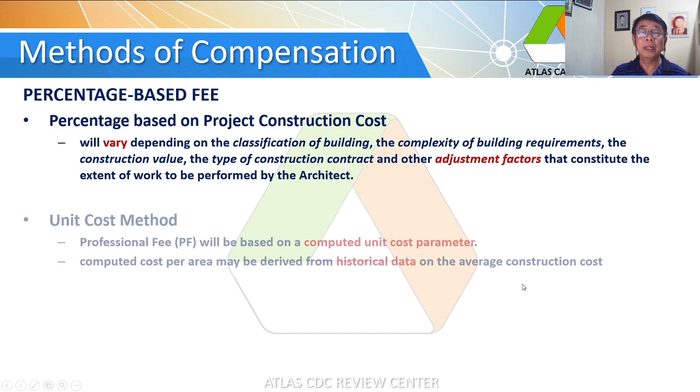So later on, I'm going to discuss what are these adjustment factors that have to be considered in order to determine the percentage fee based on project construction cost. Now we go to the new one that is introduced in this particular document, the unit cost method. Although other professions are using this already, like for example electrical engineers, they charge according to per ampere, and structural engineers I think charge according to per square meter.

So here, the professional fee of the architect is based on a computed unit cost parameter, and that is per square meter. Now, the computed cost per area may be derived from historical data on the average construction cost. So you have to be aware of the prevailing average construction cost. So let's say we have an office building project with 1,000 square meters gross floor area and 200 square meters non-gross floor area. For GFA and non-GFA areas, please refer to Rule 7 and Rule 8 of the NBCP.

So for example, we have the average project construction cost based on historical data, or the prevailing one, is 30,000 pesos per square meter. So that is the construction cost for an office building project. And the PF of the architect uses the percentage of project construction cost. Let's say the architect is using 6% of the project construction cost as the PF.

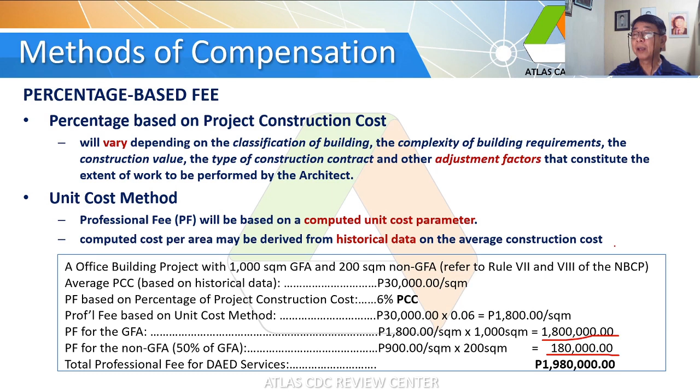So here, in this case, the client would easily understand that if the floor area increases, there will be an increase in the professional fee as well. So sometimes kasi the client, they better understand the relationship of the cost according to the floor area. So we have this one again.

Part of the percentage-based fee method is the value-based pricing, or the percentage of gross rentals. And this particular type of compensation is usually used for building administration. So this is based on the outcome of revenue, cost, and profitability result of a project management, or based on a measurable profit on specific revenues. So the remuneration may be based on a certain percentage of the gross rental.

So if the building administrator can increase the gross rentals through some efficient use of spaces, then the compensation of the architect doing building administration will also increase because it is based on the gross rentals.

So we now go to the lump sum or the fixed fee. So this is normally not used for private projects, but now it is already being allowed. But caution is to be exercised when making use of the lump sum or fixed fee. So gagamitin lang ito when the scope of services required can be clearly and fully defined at the outset of the project. So meaning, klarado na lahat. Well-defined ang scope of services or scope of work na naka-stipulate doon sa contract.

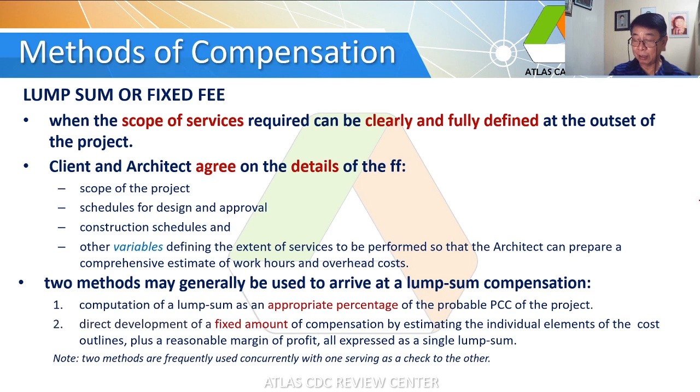So we now go to the third one, the time-based fee. And the time-based method of compensation is typically used for the following. So we have services which are not well defined, so you cannot use the lump sum, or you cannot use the percentage. So for services like pre-design, medyo sa pre-design services kasi more on documentation, so you can compute how many man hours can be used to do that particular kind of service.

We have partial services, additional services, or services as an expert witness, or a specialist expertise or professional architectural consultancy services. So pwedeng per hour yan, per day, per month, and so on.

The hourly or per diem daily rates for architects and their staff should be agreed at the outset, sa simula pa lamang ng usapan or sa contract, nag-agree na sa contract kung magkano talaga yung hourly or per diem. Additionally, the client and architect should agree upon a time period for review and adjustment of the hourly rates, perhaps annually, so pwedeng ilagay din sa contract yung provision na pwede mabago yung rate because kakaroon din ng inflation, to adjust for inflation and other factors.

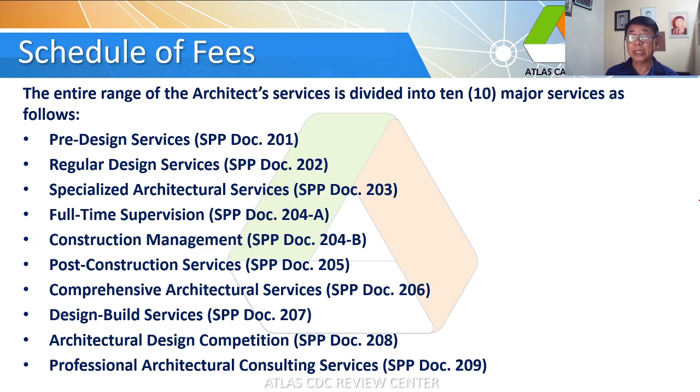If you notice, one type of service here is architectural design competition, so this will not be included in our discussion for the schedule of fees. So from 207, we skip 208 and go to 209.

So let's start with SPP document 201, pre-design services. You can use the following method of compensation: the MDPE, actually this is the most preferred one for pre-design services because pre-design services does not entail any design output. So we have professional fee plus expenses, lump sum or fixed fee, per diem honorarium plus reimbursable expenses, or the mixed methods of compensation.

Now for pre-design services, compensation is based on the architect's or architectural firm's talents, skill, experience, imagination, and the type and level of professional services provided. Since MDPE is the most preferred one, you can choose your multiplier, from 1.5 to 2.5, and the choice, of course, is based on those mentioned factors.

Now, the architect should request a 5% acceptance fee based on the agreed professional fee upon signing of the agreement. So that 5% acceptance fee is like an initial payment. It's not a down payment but an initial payment for accepting the challenge to do the architectural services. Now, the client shall make progress payments upon request of the architect within 7 calendar days from the submission of the statement of account. The architect can set how the progress billing will be, whether once a month or every 15 days, and shall submit to the client a statement of account, so that the client has a time frame of 7 days to pay the architect.

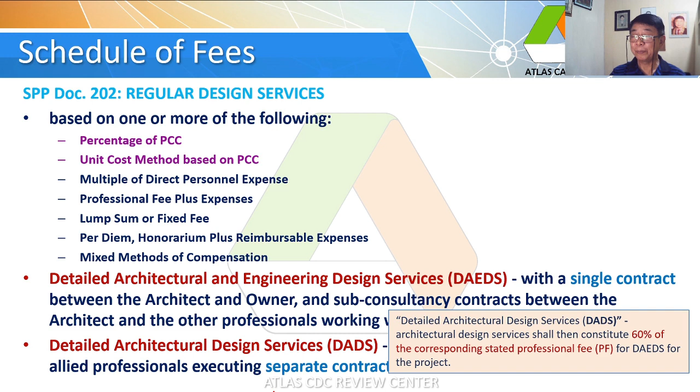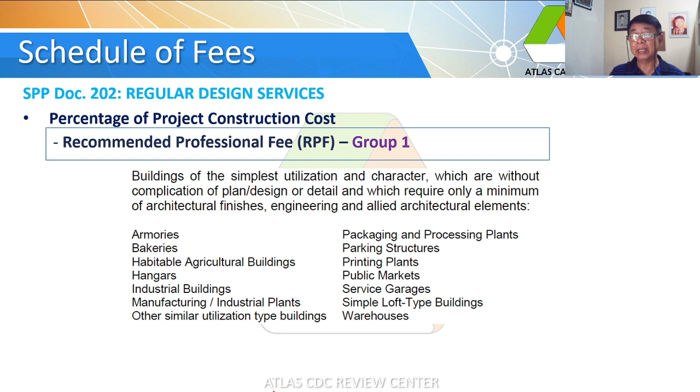So this is the recommended professional fee. Take note, we use the recommended professional fee, not the basic minimum fee - just the recommended professional fee, meaning you may use this one, or go higher or lower using the adjustment factors based on the requirements of the project.

Now for the complete services, the detailed architectural engineering design services or DAEDS, for Group 1, for 50 million and less, the recommended professional fee is 5%. If that is only architectural design services, then the professional fee is 3% of the project construction cost. Now if the project construction cost is over 50 million, the percentage goes lower for every particular range. So if it exceeds 50 million up to 100 million, the excess is computed at 2.4% for DADS and 4% for DAEDS.

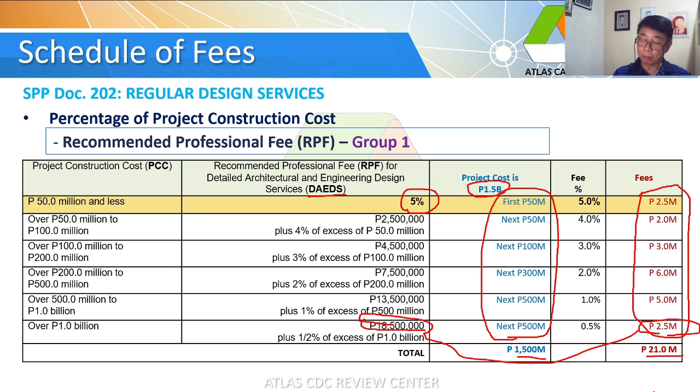Now we go to group 2. These are buildings of moderate complexity of plan design. So you have here the residential condominiums. So these are high-rise residential, multi-story service apartments. And also we have commercial buildings, retail, shops, supermarkets. And also we have institutional buildings like city town halls, civic centers. And we also have here parks and recreational facilities. So these are the most common types of projects.

So group 2, the recommended professional fee for DAEDS is at 6% for 50 million or less. And for DADS, the detailed architectural design services, it is 3.6%. Again, kapag lumampas sa 50 million yung construction cost, then take note the excess is computed at lower percentages.

Now we go to group 3. These are now the buildings of exceptional character and complexity of plan design. And these, if you will notice, yung mga buildings na to ay very complicated in terms of planning and design because marami silang rooms, maraming partitions, and also they incorporate certain types of specialty equipment inside the buildings.

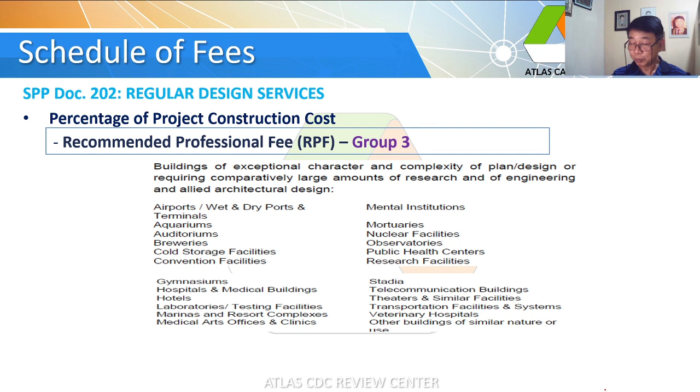So for group 3, the recommended professional fee for the complete type of service, detailed architectural engineering design services, is at 7% for 50 million and less. And for detailed architectural design services only is 4.2%. Now, if we summarize, for detailed architectural and engineering design services for groups 1, 2, and 3, we have 5, 6, and 7% respectively.

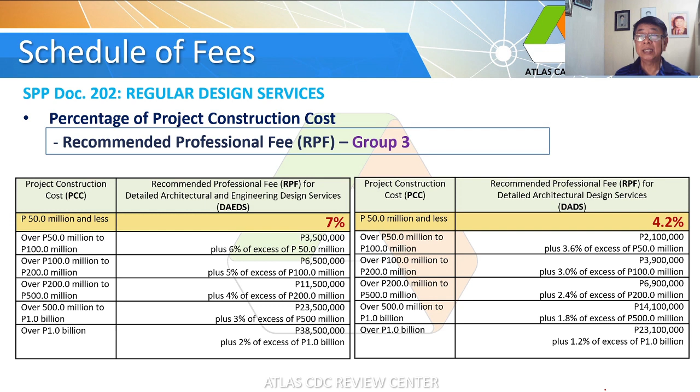Now we go to group 4. This is the most common residential type of project, but only for single detached or single attached or duplex, row houses, shop houses, or small apartment houses, and townhouses. So these are the single family dwellings only. So we have here the DAEDS. The recommended professional fee is 10% of the project construction cost. Now, if that is detailed architectural design services or DADS, it is at 6% of the project construction cost.

Now, for group 5, we have monumental buildings and other facilities requiring a consummate design skill. So medyo detalyado itong mga designs dito. So we have the DAEDS at 12% of the PCC, and for detailed architectural design 7.5% is the recommended professional fee.

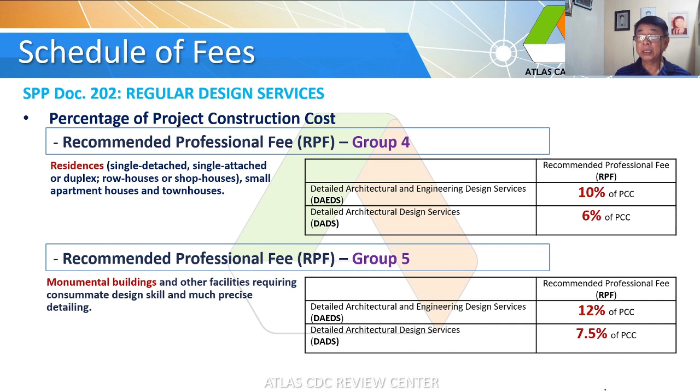Okay, so under group 6, we have the repetitive construction of similar buildings. Parang meron, let's say, regional office building na prepared a single plan and design, and then that particular plan and design will have to be repeated all throughout different regions. Of course, there will be some minor adjustments that will be undertaken because of certain site conditions.

So for the first building to be constructed, your RPF is 100% of the RPF for that particular type of building. So let's say that is a regional office building. Office building is under group 2, the RPF is 6%, which means for the first building, your RPF is 6%. Now, for the second building it is 50% of your RPF. So for the second office building, it means 50% of 6%. So that will be 3% only of the PCC.

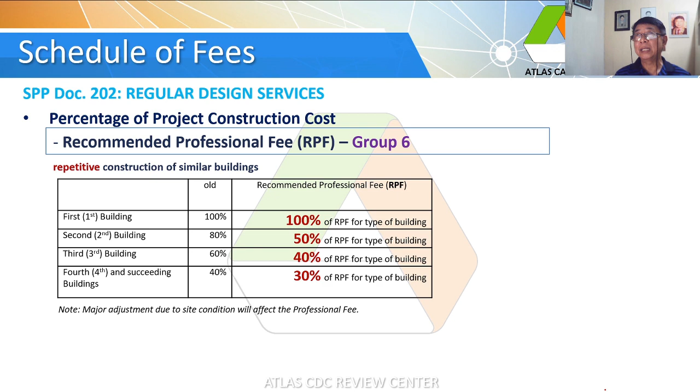And the third building is 40% of the RPF. So, 40% na lang of 6%. That is 2.4%. And fourth and succeeding buildings will be 30% of RPF. So 30% of 6% for the fourth building means it is 1.8%.

Okay, we go to group 7. These are now for housing projects that involve the construction of several residential units on a single site. So pare-parehas yung design ng building. Let's say model house A, 100 units to be constructed. So you only prepare one plan for that particular house model. And so for that, the recommended professional fee is here.

The first unit, for complete architectural engineering design services, is 10%. And for detailed architectural design it is 6%, dahil halos pareho ito ng group 4, na single family dwelling. For apartments, hindi ito ginagamit, but you have to make use of group 2.

Now from 2 to 10 units of that housing unit, the fee is 50% of the fee for the first unit, and this is computed for each additional unit. So, kung magkano ang fee mo sa first unit, kalahati na lang noon ang charge mo sa bawat additional unit up to the 10th unit.

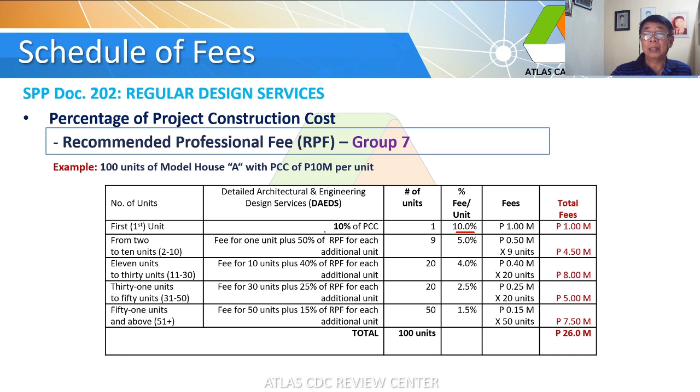So let's say you have 100 units to be constructed using model house A with a project construction cost of 10 million per unit. So ito yung reference natin. And the first unit, that is computed if your professional fee is 10%. Ginamit natin 10%. So 10% of the 10 million, your professional fee is 1 million.

Then for the second up to the 10th unit, so you have 9 units additional. So each unit is computed at 50% of 10% is 5%. So meaning that is 500,000, 0.5 million times 9 units, kasi for each unit. So it means you have a total of 4.5 million.

Now for the additional 20 units, that is computed at 40% of the first unit. So that is 40% of 1 million is 400,000 times 20 units. So your fee is 8 million. And for the next 20 units, it's computed at 25% of 10%. So that is 25% of 1 million is 250,000 times 20 units is 5 million.

And then the remaining 50 units is computed at 15% of 10%. So that is 1.5%, or 15% of 1 million is 0.15 or 150,000 times 50 units is 7.5 million. So you just total all of this to come up with your total professional fee of 26 million.

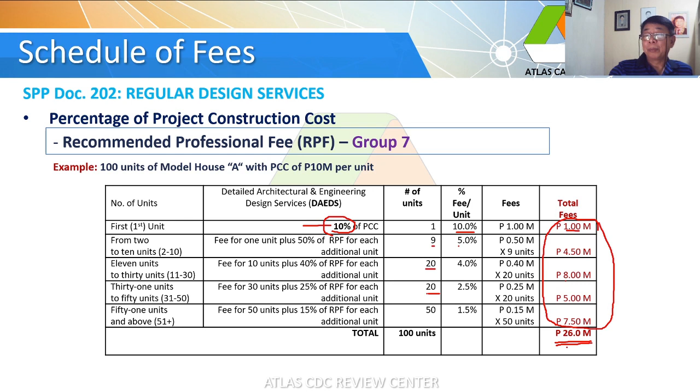Now for group 8, these are for projects involving extensive detailing such as designs for built-in components or elements, built-in equipment, special fittings, screens, counters, architectural interiors, and development planning and/or design. The recommended professional fee is 15% of the project construction cost.

Now for group 9, this is for alterations, renovations, rehabilitations, retrofit, and expansion additions to existing buildings belonging to groups 1 to 5. And so the compensation of architects should be increased by 50%, or a total of 150% of the RPF. So meaning you only have to multiply the RPF doon sa groups 1 to 5 by 1.5.

No? So let's say residential yan na i-renovate at ang RPF ginamit mo is 10%. So if you are doing renovation, it is 1.5 times 10%, meaning your fee now is 15%. Okay? Or you can just compute it by having 10% plus 50% of 10% is 5%. So that is a total of 15%. Parehas lang yon.

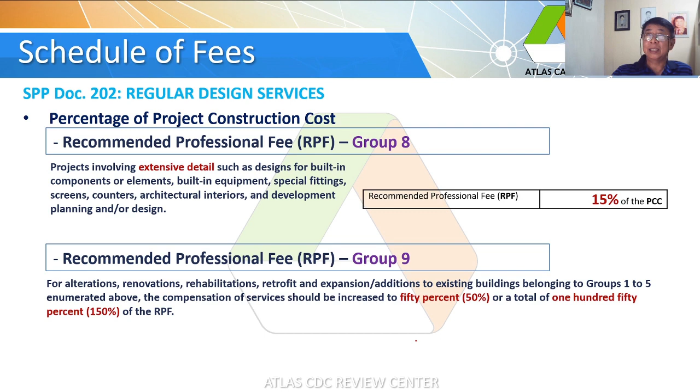Okay, we now go to group 10. This is for services wherein the architect is engaged to render opinion or give advice, clarifications, or explanation on technical matters pertaining to the profession. So this includes the pre-design services in SPP document 201 under consultation.

And so, the chargeable RPF of the architect shall not be less than 1,000 pesos per hour, subject to increase depending on the extent and coverage of service required and the location where the architect shall render his services. So pwedeng tumaas pa yan kung mas malayo yung location kung saan mag-render ng service yung architect, at saka kung mas complicated yung gagawing trabaho.

So, when rendering services as an expert witness, the architect's fee shall not be less than 5,000 pesos per appearance, regardless of whether the scheduled hearing took place or not. So this is per appearance. Kahit na hindi natuloy yung hearing, it is chargeable already.

So the amount excludes the cost of transportation and accommodations when and where required. So kung malayo yung location at kailangan magstay doon yung architect, then the cost of transportation and accommodation shall be shouldered by the client. And okay, so aside from this per hour or per appearance fee, the architect also shall be paid what you call the per diem if the location is very far from the architect's office address.

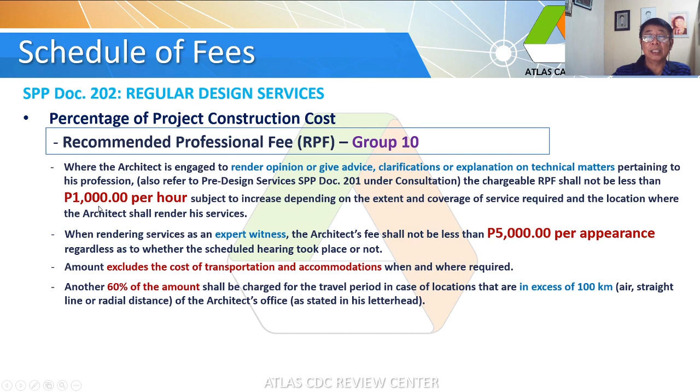Now note, all references to fixed amount shall refer to the value of the Philippine peso as of October 2014. So, kaya ito nilagay kasi nga nung ginawa yung document na to is nung 2014 pa. And so, you have to change this according to the value of the Philippine peso noong 2014 versus the current value of the Philippine peso.

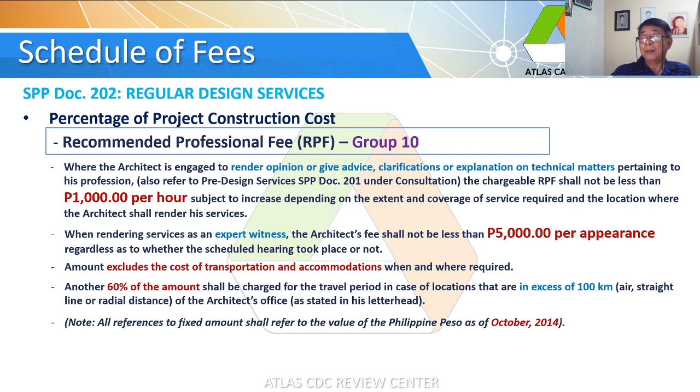Probably you can make use of as reference the annual inflation rate. The average inflation rate I think is at 5%. So you can make use of that, or you can just refer to the central bank record for the inflation rate.

Now, this is the manner of payment. Upon signing of the contract as serving as your acceptance, the mobilization component is 5% of your professional fee. So, you will be paid already once you sign the contract. Upon the completion of the schematic design services, you get an additional payment that will correspond to a total of 20% of your professional fee. So, kung meron ka ng 5%, madagdagan ng 15%, so the total is 20%.

Upon completion ng design development services, the total payment to the architect should be already 40% of the professional fee. And upon completion of the contract document services, the payment to the architect is already amounting to 90% of the professional fee. And now, within 15 days after the awards to the winning constructor, your professional fee shall be adjusted so that it constitutes 90% of your professional fee.

Pero kung sobra ang naibayad dito, upon completion ng contract documents, at lumalabas mas mababa ang computation dito based sa winning bid, then you don't need to return the excess money. So, pwede naman mag-balance yan sa last payment. Now, upon completion of the work, you will be paid already 100% of your professional fee.

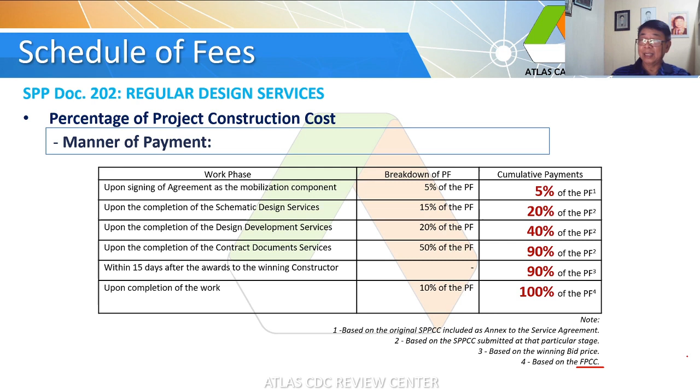So let's take a look at how that works for the manner of payment. We have a commercial building, and the architect is to do detailed architectural engineering design services wherein the RPF is 6%. Let's say 6% nga ginamit ng architect for that commercial building. And so upon signing of the contract, the estimated probable project construction cost is 50 million. And so the fee, 6% of 50 million, is 3 million. So that is the professional fee.

And so upon signing of the agreement, you are to be paid already 150,000, constituting 5% of your professional fee of 3 million. Now, once you prepare the schematic design phase, then you come up with a new cost estimate of 55 million.

And so with that, your professional fee, 6% of 55 million, is 3.3 million. And so, upon completing the schematic design, you must be paid already a total of 20% of your professional fee. So 20% of 3.3 million is 660,000, but you are already paid 150,000. So babawas natin yan, and so the receivable is only

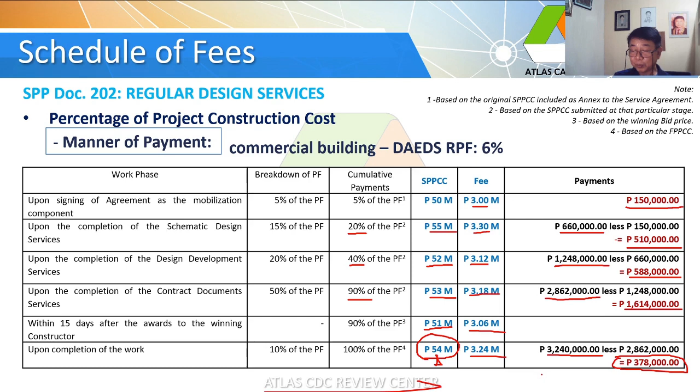So, hindi naman magulo. Pero minsan, ang client, magtataka, bakit pabago-bago pa itong professional fee natin? Why not just make use of one professional fee as reference, and then saka lang natin i-adjust sa final kung magkano talaga yung project construction cost, the final cost, para hindi magulo yung computation dito.

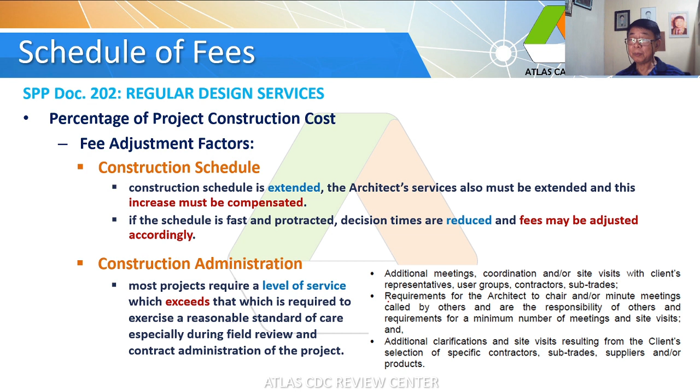And also the architect is to do additional clarifications and site visits resulting from the client's selection of specific contractors, sub-trades, and suppliers. So if you are to do this additional work, then that can be added in the contract as an additional cost to be paid by the owner.

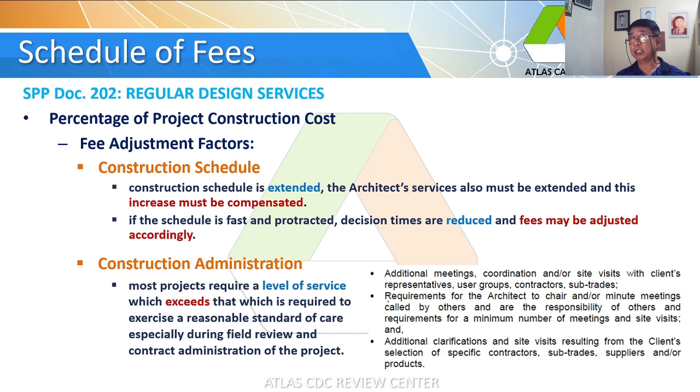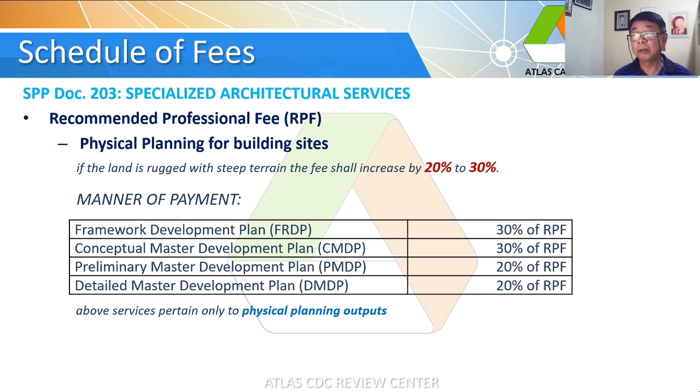Now, the manner of payment for the framework development plan is 30% of your RPF, and for the conceptual master development plan is 30%. Preliminary master development plan is 20%, and detailed master development plan is 20%. Take note that these services pertain only to the physical planning outputs.

It doesn't include detailed engineering design services for the roadworks and utilities. Now, for other specialized services, under document 203, you can compute the compensation through man-months, that is man-days, multiplied by 8 man-hours, and multiplied by a factor. Actually, this is the same as the multiple of direct personnel expense. Also, aside from that, you can add per diem plus reimbursable, or you can make use of retainer or the rate cost times a multiplier if the one doing is a professional architectural consultant.

Now for document 204A, full-time supervision, the fee is based on one or more of the following: the percentage, multiple of direct, professional fee plus expenses, lump sum or fixed fee, per diem honorarium plus reimbursable expenses, or the mixed methods of compensation. And for the RPF, for the percentage fee, the recommended professional fee is 1% to 1.5% of the project construction cost.

Or the architect doing construction management is compensated using construction management contracting concepts like award fee provisions, price adjustment provisions, firm fixed price incentive, cost plus incentive fee (CPIF), or cost plus award fee (CPAF), and cost plus fixed fee. So these contracting concepts are discussed when you study further construction management.